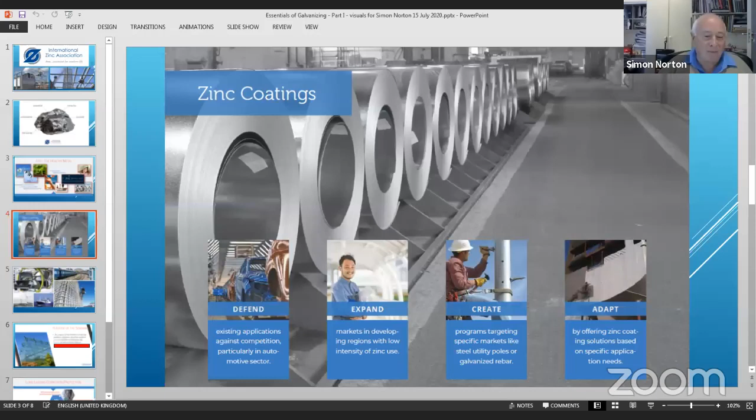Zinc thermal spray can be used on the hulls and superstructure of vessels such as trawlers. And later on, we'll see an example of zinc thermal spray as it's used on wind farms.

So the purpose of this seminar is to educate architects, engineers, and other specifiers about the benefits of using hot-dip galvanized steel on a myriad of projects. And we've produced a marvelous booklet for you with everything you'll need about galvanizing.

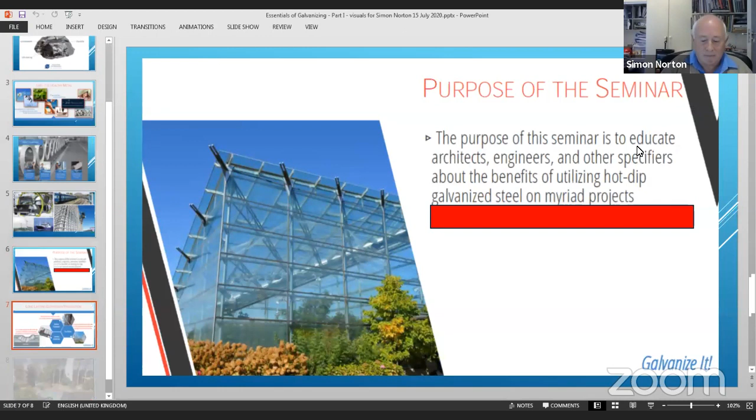Just to briefly introduce you to the concepts of zinc as a material for galvanizing, it offers three possibilities. Firstly, it's a barrier. Secondly, electrically, it is the cathodic protector, and it is actually sacrificed first. And thirdly, it forms what we call a zinc patina, where it reacts with the atmosphere with carbon dioxide to form a very tough film.

But that I'm going to leave to the experts later, to Terry Smith, who'll come in a short while.

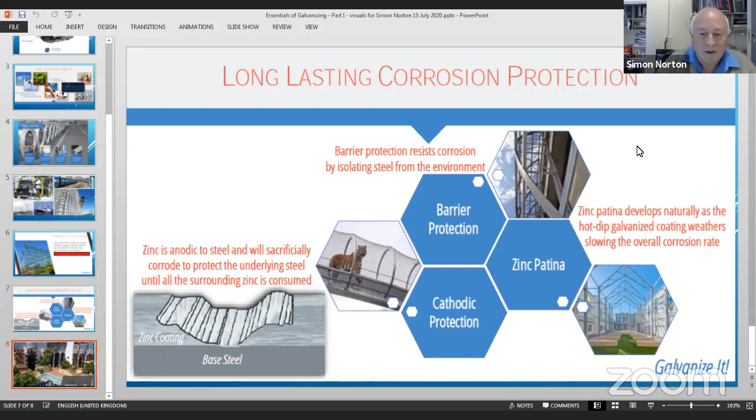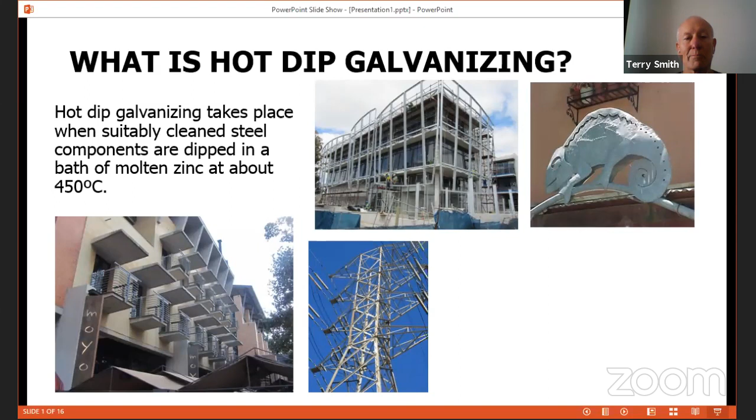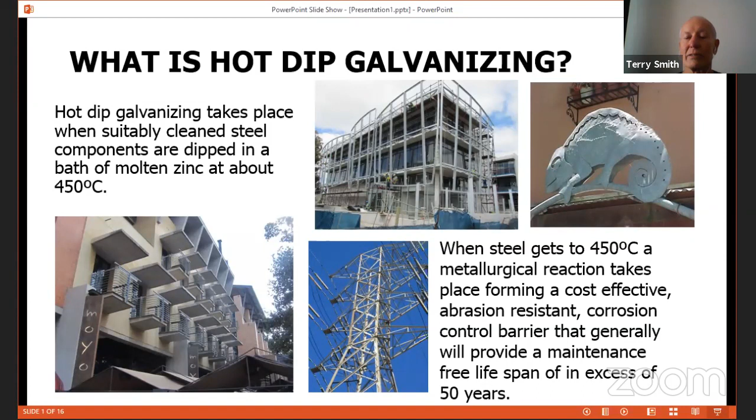Ladies and gentlemen, I'm going to talk a little bit about hot-dip galvanizing, as you heard. We asked the question, what is hot-dip galvanizing? Hot-dip galvanizing happens when you take pre-cleaned steel and dip it in a bath at 450 degrees C. Zinc melts at about 419 degrees C. When the temperature of the steel reaches 450 degrees C, a reaction takes place, giving you an abrasion-resistant, cost-effective coating, which will last at least 50 years in the atmosphere.

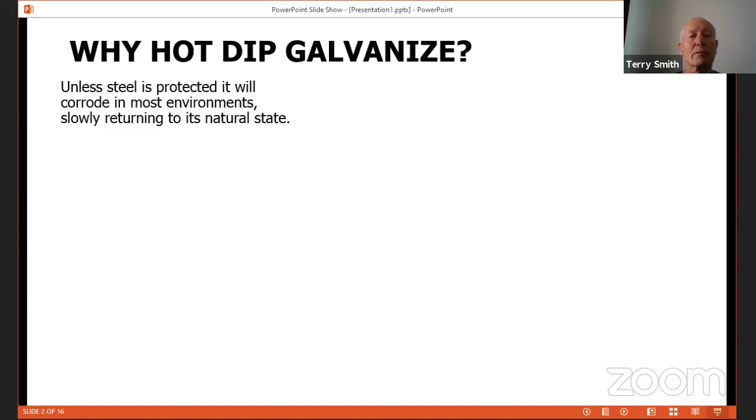Why hot-dip galvanize? Unless steel is protected, it will corrode and slowly return to its natural state. Putting a barrier coat on, such as galvanizing or paint, is good for corrosion protection. Unlike paint, zinc and its alloys from hot-dip galvanizing are metallurgically bonded to the steel and have been around for 185 years.

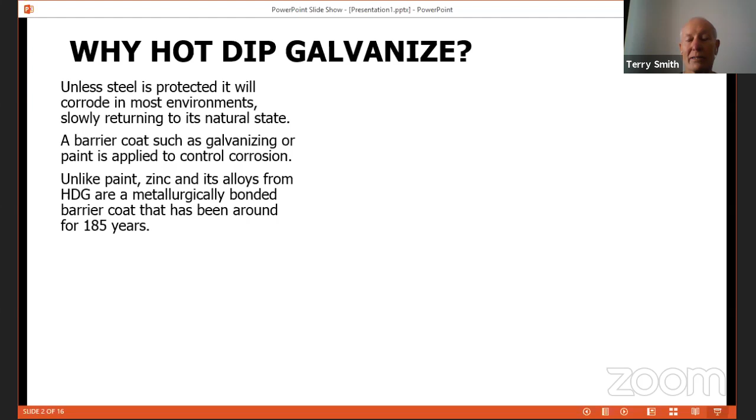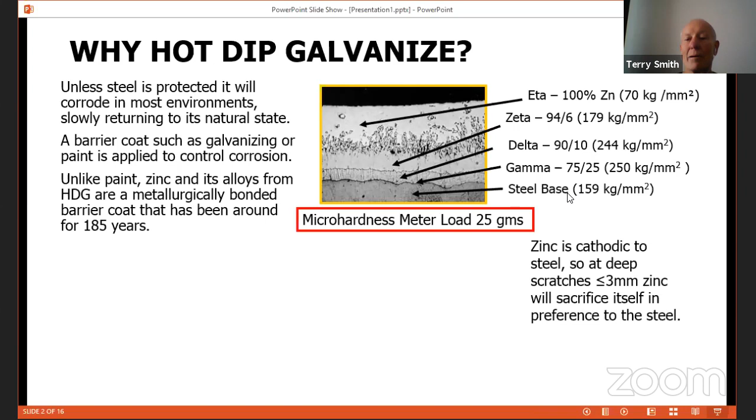Zinc is also cathodic to steel. So at a scratch of up to 3 millimeters, the surrounding zinc will preferentially corrode in favor of the steel. This can be seen here in the typical corrosion cell. On one side, we see steel, which is the cathode. On the other side, zinc, which is the anode, placed in an electrolyte with an electrical connection - those four things constitute the corrosion cell. So using this technique, the zinc sacrifices itself in preference to the steel.

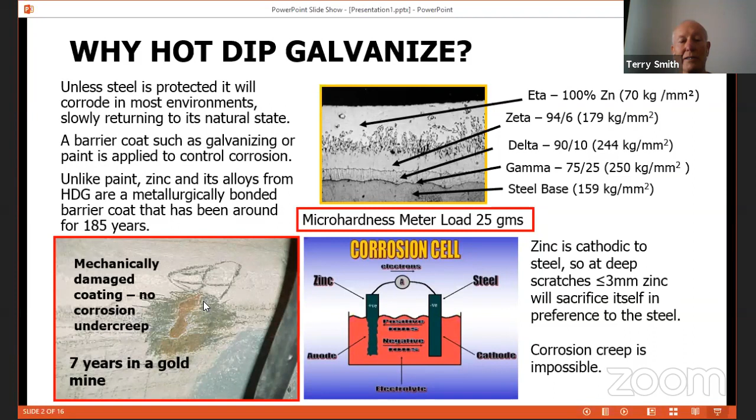Corrosion creep is also impossible with hot-dip galvanizing. Here's some mechanical damage to the coating after 7 years in a gold mine on some shaft guides, and you can see there's no corrosion creep at all.

Why hot-dip galvanized? Inspection is easy. All we have to look at is coating continuity and coating thickness. The process is extremely quick, and there's no curing time. Once it's cooled, components can be inspected and loaded on a truck. It's also an honest coating. If steel is not clean, it will not hot-dip galvanize.

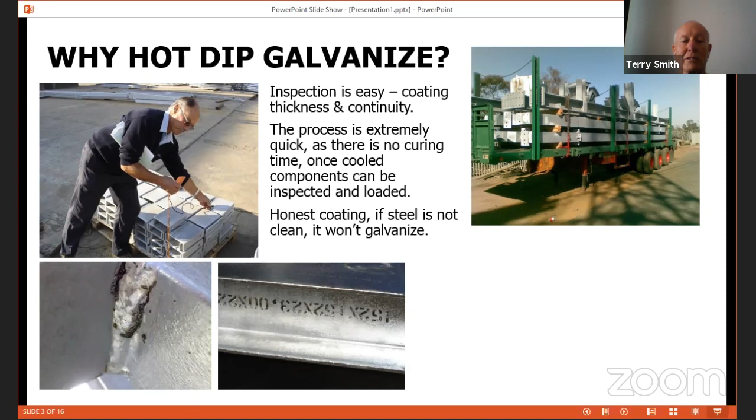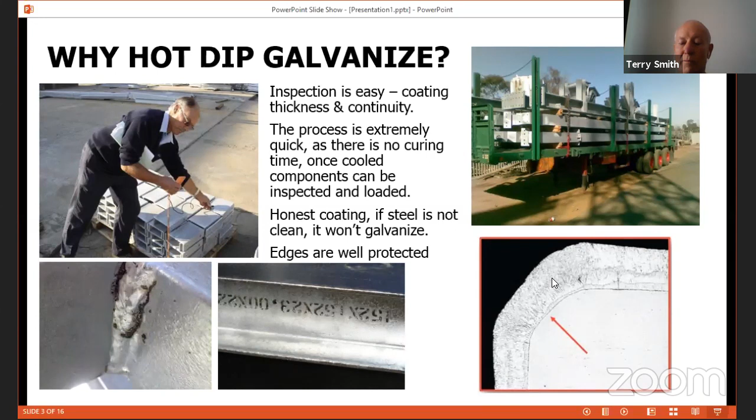And here you can see typical examples. So weld slag, which is not removed, is shown typically after galvanizing. There's some oil-based lettering, which wasn't removed. You can see it. So the converse of that, if the steel looks good, it is good. And edges are also well protected, very different to paint, where paint thins out and would normally have to be stripe coated. Galvanizing forms equal coating around the edges.

Comparing types of hot-dip galvanizing, you have continuous hot-dip galvanized sheet to that standard. This is the process. Items are decoiled and go through a welding process, looping, and then into an annealing furnace, which is heated to about 900 degrees C, runs down into the zinc bath at about 100 to 140 meters a minute, through these gas or air knives, which mechanically wipe the coating to the different coating grades that are available.

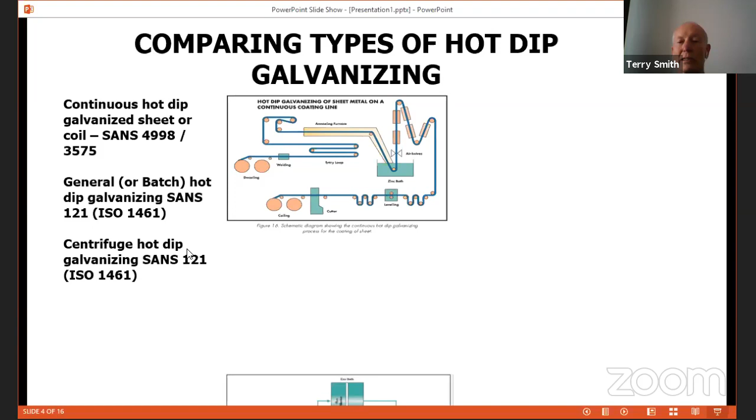General or centrifuge galvanizing are both done to SANS 121. So this is the process. It starts off with jigging, degreasing, water rinsing, acid pickling, rinsing again, final fluxing, drying, and then into the zinc bath where the reaction takes place. Centrifuge galvanizing goes through the bottom process here.

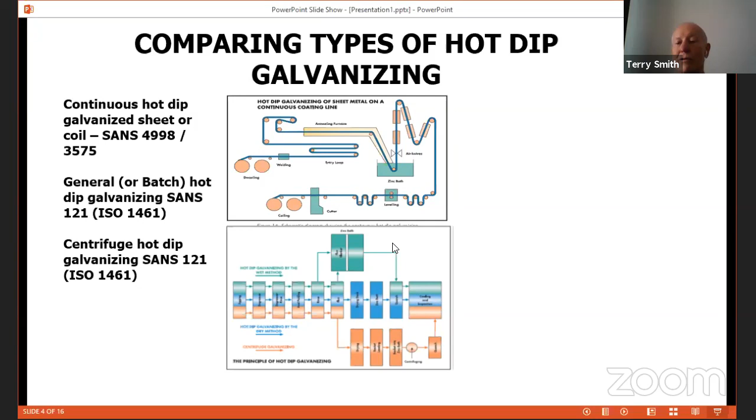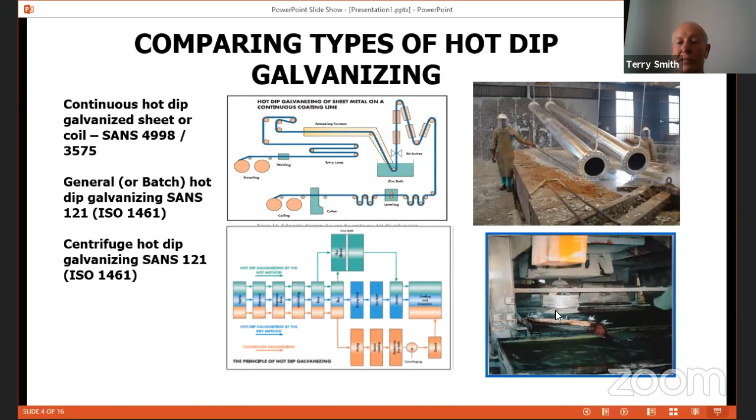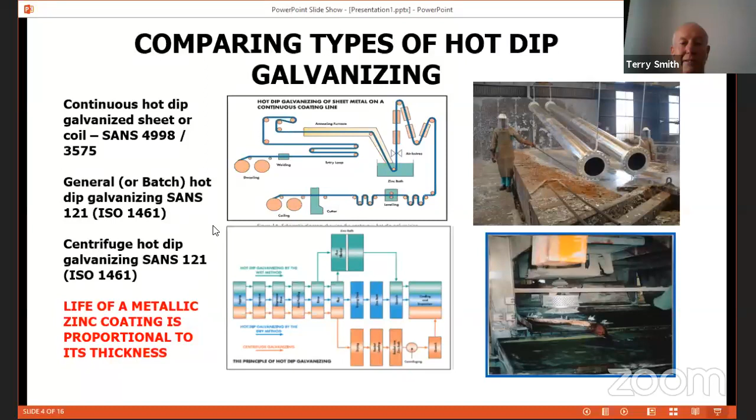After galvanizing in baskets, it goes on to a centrifuge, and that rapidly spins. Here you can see hot-dip galvanizing coming out of the bath, general galvanizing, and here's a spin galvanizing operation where the basket is opened out and the items then fall out into the quench bath. Just bear in mind that the life of a metallic zinc coating is proportional to its thickness. So the thicker the coating, the longer it will last.

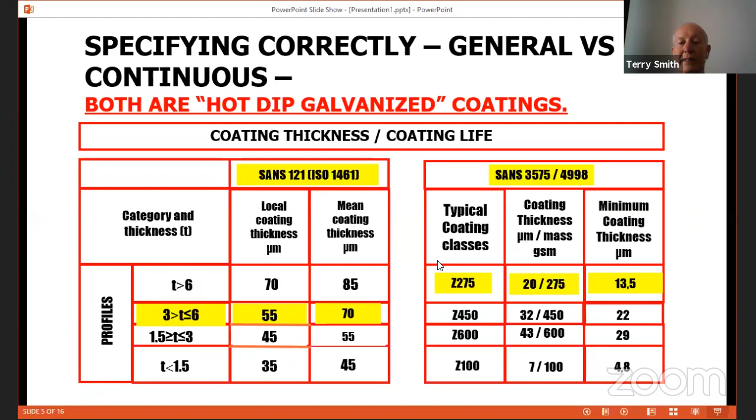Here's a comparison between two different specifications, one general and one continuous. Both are known as hot-dip galvanized coatings. What I've done is I've taken the instance of SANS 121, which is the general galvanizing spec, and I've taken a profile of 3 millimeters or less than 6. You can see the local coating thickness is 55 and the mean is 70 microns. If you look over this side under the continuous galvanized, I've got Z275, which is a nominal coating of about 20 microns and a minimum of 13.5. Let's compare those things on a site.

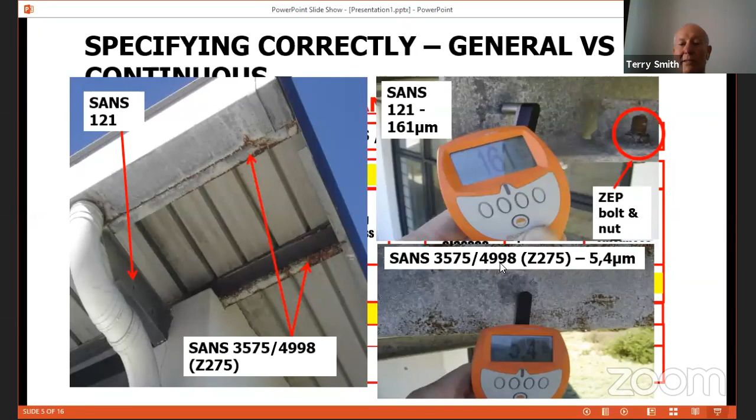Here's a site at Capricorn Park, which is about 400 meters away from the high water mark at False Bay, which is a very aggressive condition. Here you can see some trusses, which are hot-dip galvanized to SANS 121, coating thickness around about 161 microns. All the purlins were only continuous galvanized Z275, down to a coating of about 5.4 microns, in some areas got red rust. And that's 3 years in a C5 marine atmosphere.

This is the typical table that's given out in these three standards. You're looking at from C1 to C5 or CX environments. The more aggressive is obviously C5. If you look at C3, for instance, the corrosion rate of zinc is about 0.5 to about 2 microns a year. And you go down to C5, you're looking at 4 to 8 microns a year. And a Z275 would last between 3 to 5 years. And hot-dip galvanizing 70 microns would last between 9 and 18 years.

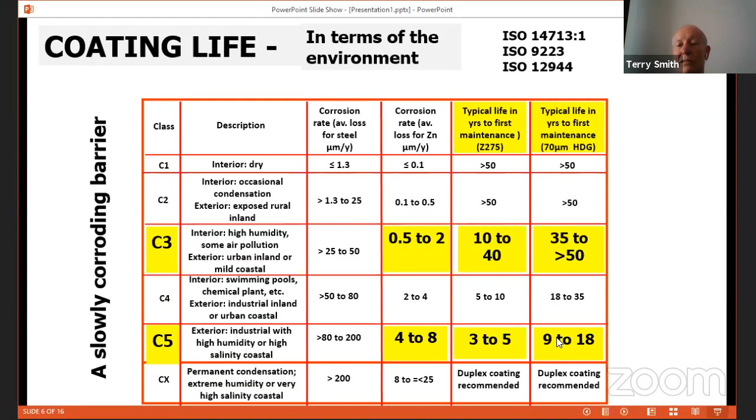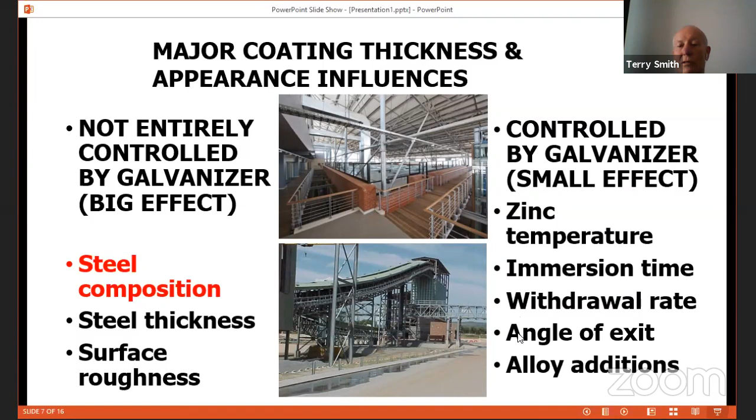Okay, so we have the major influences on coating thickness and appearance. Not controlled by the galvanizer, and having a big effect, is the steel composition, steel thickness, and surface roughness. What is controlled by the galvanizer? The zinc temperature, the immersion time, the withdrawal rate, the angle of exit, and the alloy that's added to the molten zinc. So we look at the biggest influence.

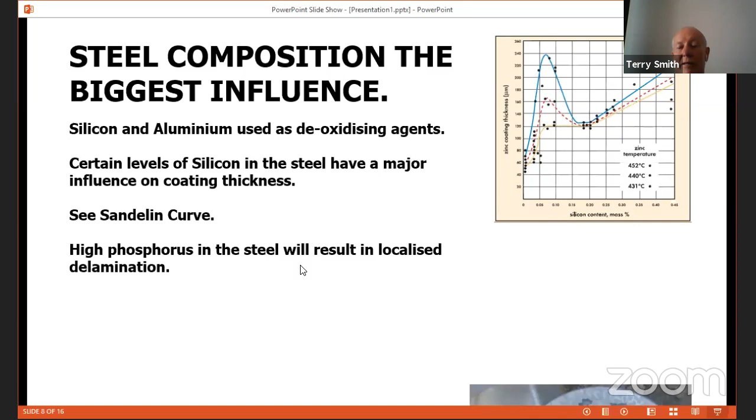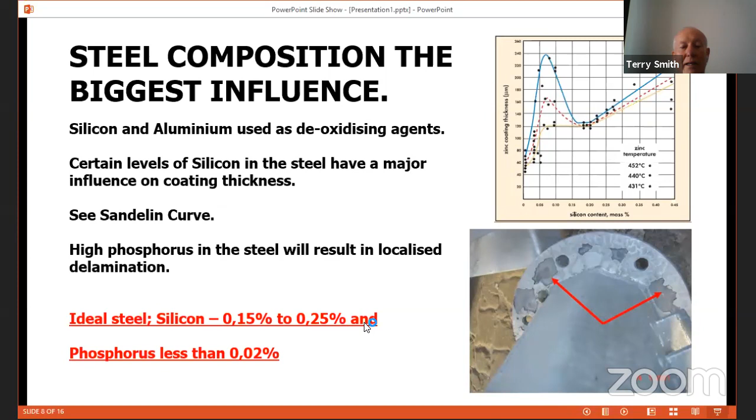So high phosphorus in steel will also result in localized delamination. Now, phosphorus is not added to any molten steel. It depends on where the steel or the iron is mined in the country or in the world. So yeah, you can see this is a mast. The bottom flange has got a high phosphorus. You can see the delamination, whereas the mast itself, the galvanizing is 100%. So ideal steel, silicon between 0.15% and 0.25%, and phosphorus less than 0.02%.

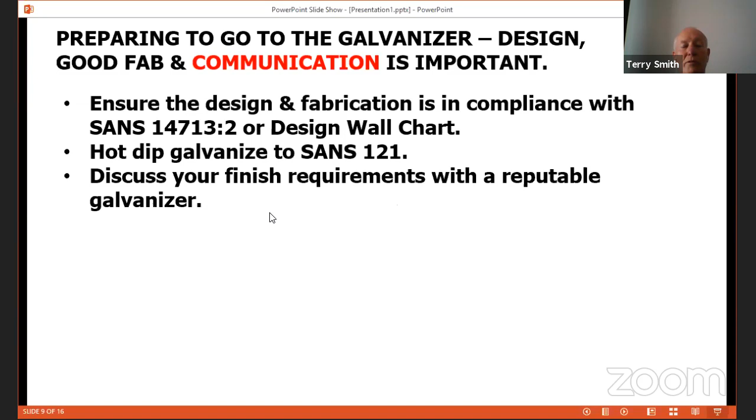Preparing to go to the galvanizer, design, good fabrication, and communication is extremely important. Ensure that the design and fabrication is done in compliance with SANS 14713 Part 2 or the design wall chart. Hot-dip galvanized to SANS 121. Don't just say hot-dip galvanized at all. Discuss the finish requirements with a reputable galvanizer. Keep on communicating either way.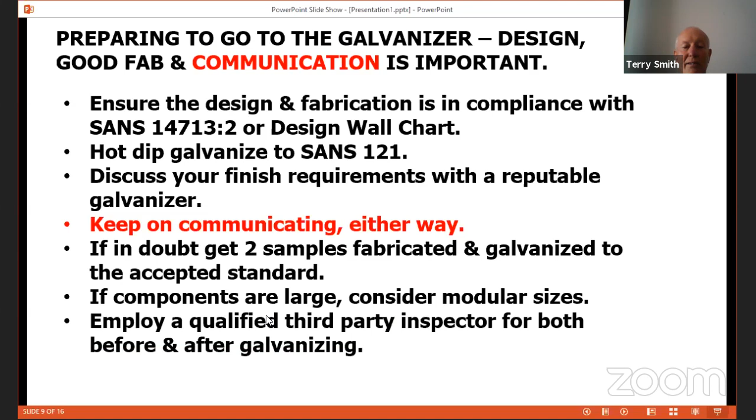If in doubt, get 2 samples fabricated and galvanized to the accepted standard. And if components are too large, consider modular sizes. Employ a qualified third-party inspector for both before and after hot-dip galvanizing. Don't forget the primary reason for hot-dip galvanizing is for corrosion protection.

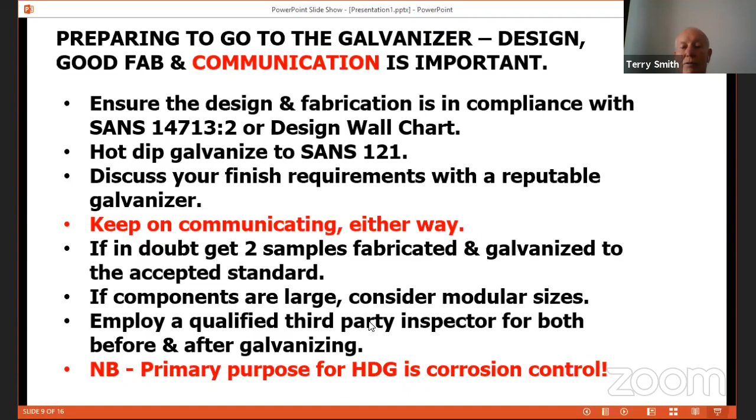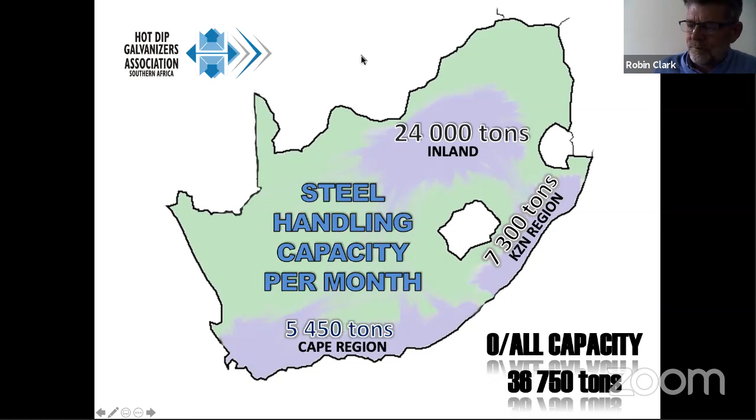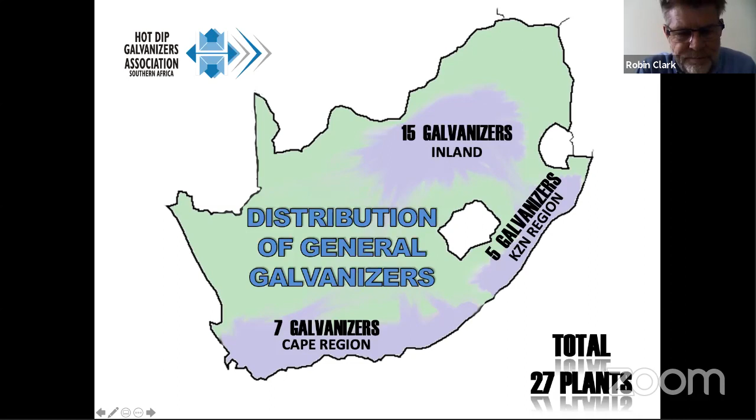We've also asked some questions with regard to duplex and duplex coatings. And I don't know if we can put up the next slide, please, Shannon. So I am aware of 2 galvanizers that have made a direct investment in a paint application on an industrial scale. But most galvanizers have developed a relationship with paint applicators.

And to expand on this, generally the project flow is the designer signs a contract with the contractor. The contractor engages with the fabricator, and the fabricator approaches the galvanizer either to galvanize or potentially to duplex. Between the fabricator and the galvanizer, they will engage with a painter, and the fabricator will be able to access a finished product, both galvanized and painted.

I've taken the liberty also to expand on the question a little bit, and most of the galvanizers that we have relationships with will be able to provide a duplex system, either in-house or, as I say, with strategic partners. Okay, most galvanizers also shot blast. They will be able to apply zinc thermal spraying to varying degrees, either as a renovation medium or possibly on a commercial basis. I believe Simon will be dealing with that in a bit.

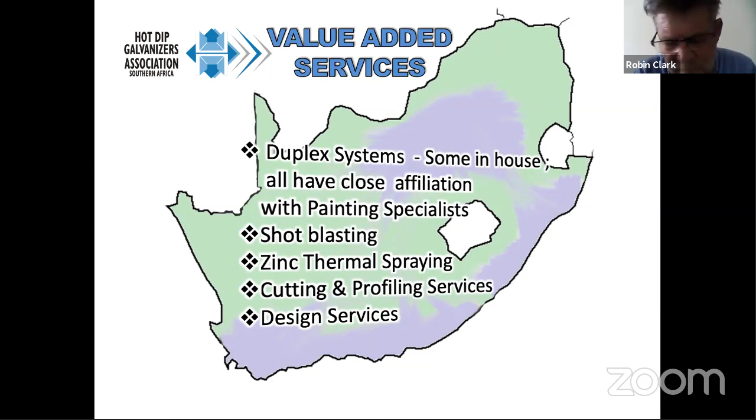So the operating norm is for a fabricator to transport and to manage the logistics for medium and large projects. In other words, bring the material to the galvanizer and then collect it. But notwithstanding this, almost all the galvanizers in South Africa, certainly amongst our members, provide a collection and delivery service, either using their own resources or contracting in as required.

Several of the larger galvanizers, particularly in the Gauteng area, have established an advanced logistical capability and are able to assist customers with direct transport to site fairly far afield as well. So those services do exist.

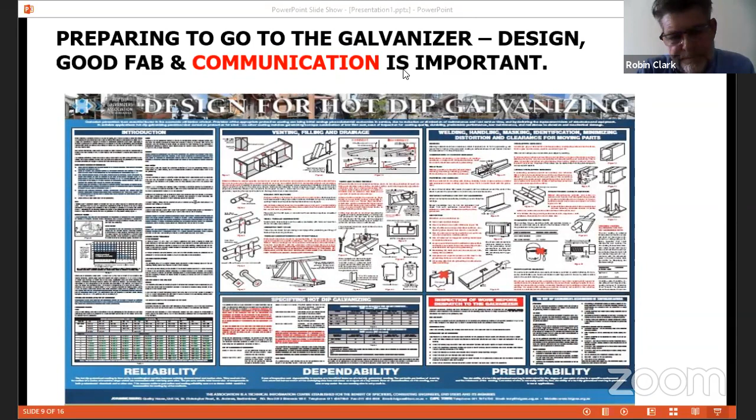We move back now to Terry Smith, who's going to explain the process to follow after galvanizing. Not working. We can hear you, Terry.

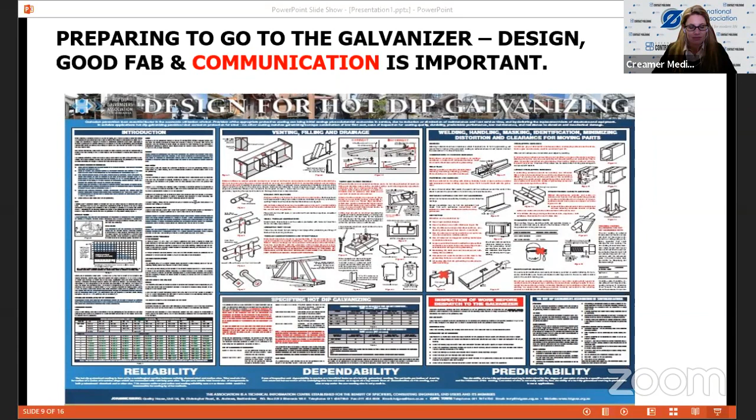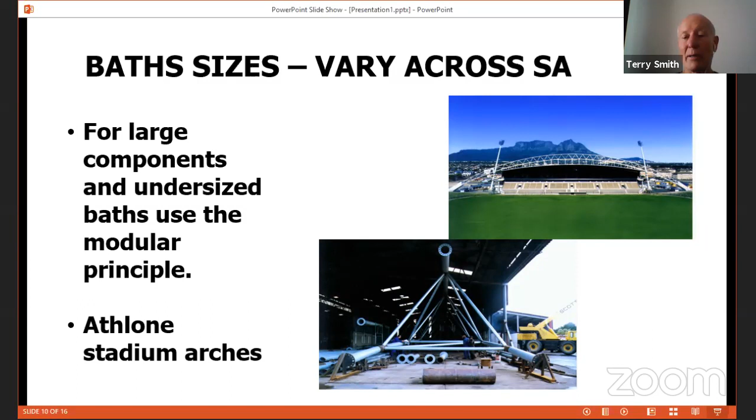So all the tubes were processed, so they were prepared for hot-dip galvanizing by masking the ends for welding purposes. They were galvanized on jigs, which gave them the right angle, right immersion. And then afterwards, the mask was cleaned off. The items were welded. As you can see there, there are uncoated areas. And then that was zinc metal sprayed, and that arch got 2 coats of paint.

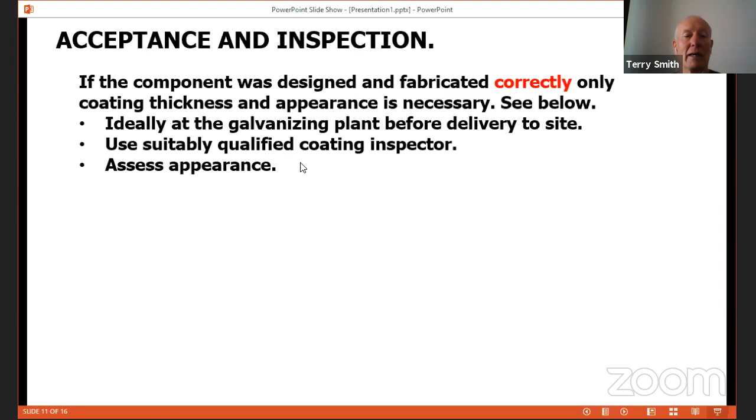Acceptance and inspection. If the component was designed and fabricated correctly, the coating thickness and appearance are the only things that are necessary. Ideally, this inspection should take place at the galvanizing plant before delivery to site. Use a suitably qualified coating inspector. And just based on that, I know the Hot Dip Galvanizers Association has courses for this purpose. Assess the appearance of the item, take coating thickness readings, according to SANS 121.

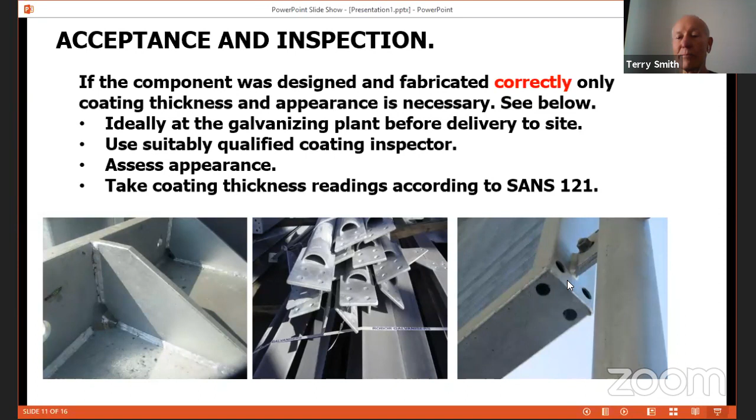And here you can see several pictures of well-designed, well-galvanized and fabricated items. These are nice big coping holes, allowing the zinc to flow through when it goes into the zinc bath. At the end of the tubes, this gusset plate has been welded inside the tube so the zinc can flow out. And the same on this one, with the holes right in the corner of the item. Appropriate versus inappropriate.

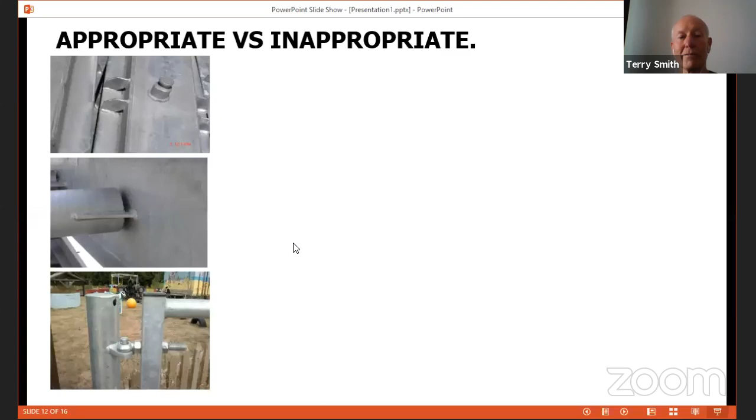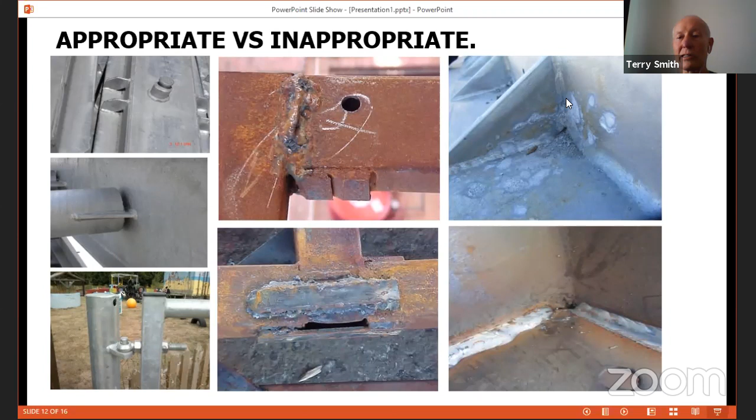And this is the less appropriate type of fabrication that we get coming into the galvanizing plant. What the guys don't realize, all the weld slag here and here, little holes, etc., and that hole not being in the right position can lead to very bad galvanizing, much the same as this. You can see these coping holes very small. You've got ash in the surface and this one as well.

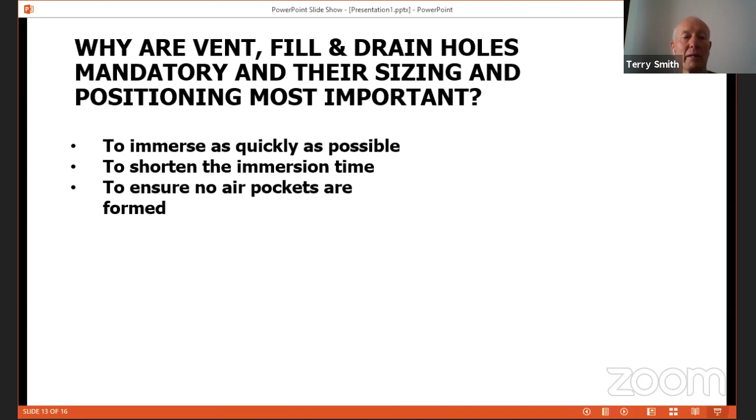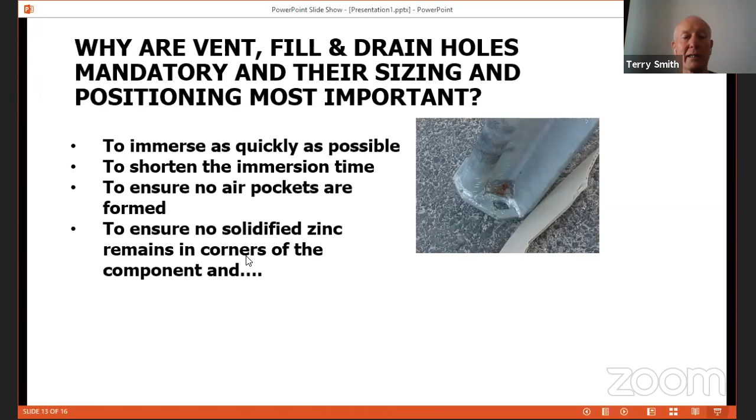So why are vent, fill, and drain holes mandatory and their sizing and positioning most important? To immerse the item as quickly as possible in the molten zinc, to shorten the immersion time, ensure that no air pockets are formed. And here you can see a typical example where you've got an air pocket, which obviously needs to be repaired. To ensure no solidified zinc remains in the corners of the component. And here you can see taking out the zinc that is solidified in that item.

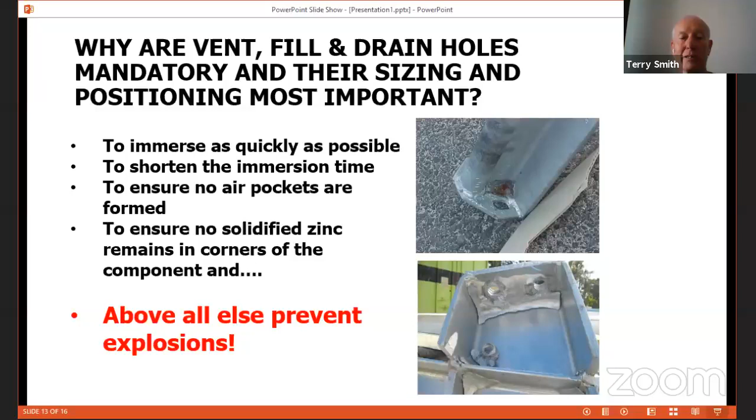Above all else, to prevent explosions. Now, generally, if you have any moisture that's contained within an item that is being galvanized, as soon as it hits the bath, that moisture changes into superheated steam, which has got a volume change of 1 to 1700 times in volume. And this is basically what happens. It's extremely dangerous, not only to the galvanizer, where this can actually certainly maim or kill people.

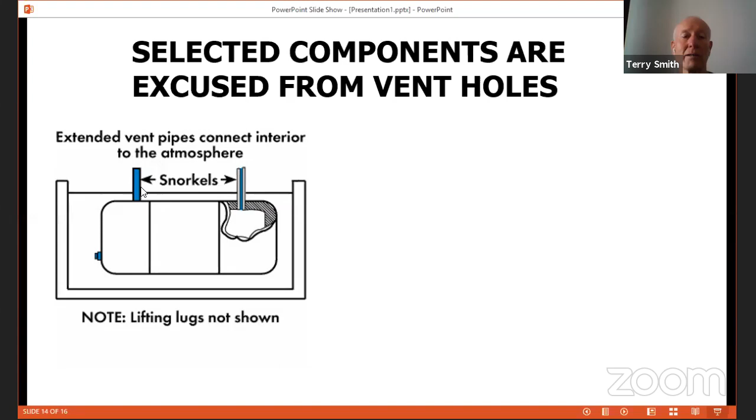Selected components are excused from vent holes. Here we have an item like this, not galvanized on the inside, with snorkels that allow the thing to be immersed, much the same as the heat exchangers. You can see the snorkels sticking out. And then when it's put into the galvanizing bath, it is forced in, so it actually displaces the zinc and it coats only on the outside, and then they cut the snorkels off afterwards.

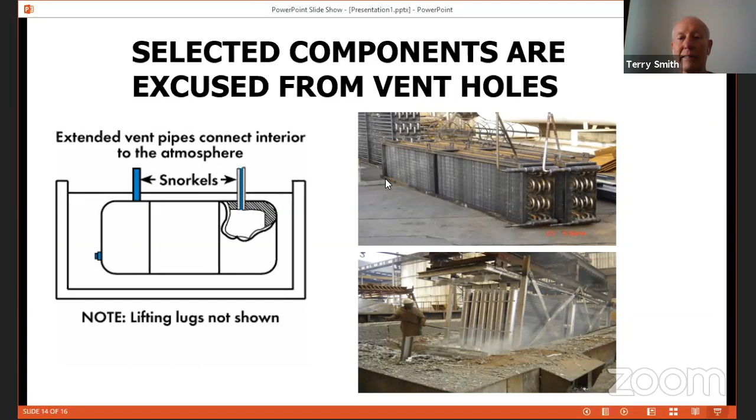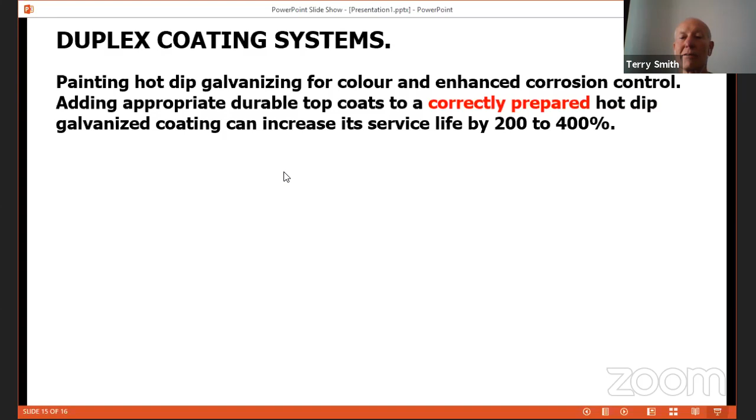Duplex coating systems, as Robin talked about, painting over hot-dip galvanizing for color and enhanced corrosion control. Adding appropriate durable top coats to a correctly prepared hot-dip galvanized coating can increase its service life by 200 to 400%. Preparation is extremely important, including informing the galvanizer of the intention to duplex, as the passivation stage must be excluded.

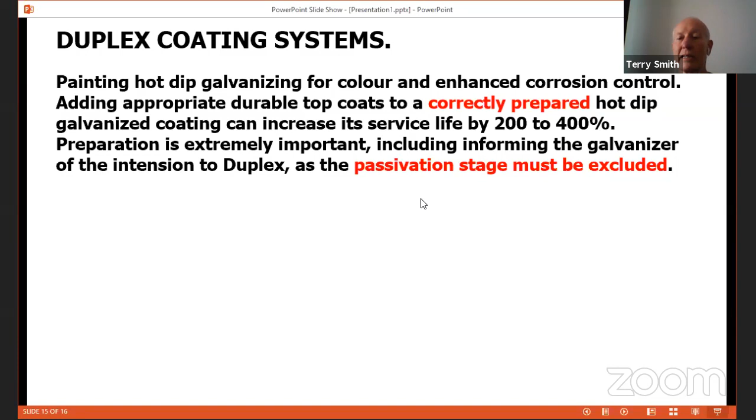Here you can see some items that have been duplexed. This is a bridge which is hot-dip galvanized and painted in the V&A Waterfront. There's a house which is about 80 tons of structural steel down in Rooi-Els. The steel was hot-dip galvanized, and then in factory conditions, 3 coats of paint were applied, and then it came to site. Items were put together and a final coat of paint was put on. It was given a 10-year guarantee.

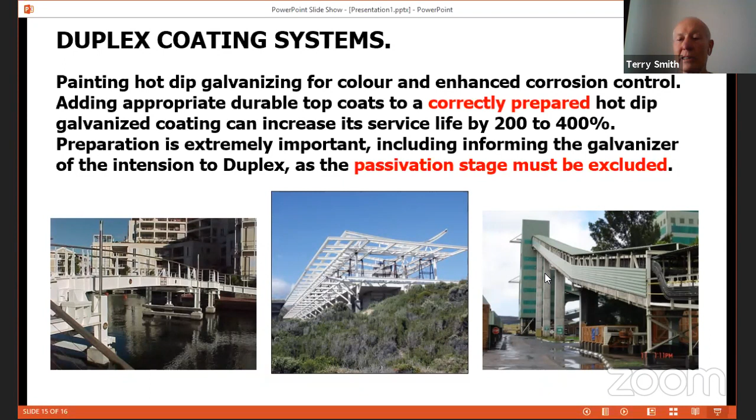This is Twistdraai coal colliery, where galvanizing was painted with a substantial paint system. And this picture was taken after about 20-odd years, and there was nothing wrong with the coating whatsoever. Additional applications in mining, which is not happening in South Africa, but I just wanted to tell you a little bit about. Hot-dip galvanizing has been the coating of choice in deep level mining for more than 50-odd years.

23,000 tons of hot-dip galvanized shaft guides and buntons ready for installation in a 3-kilometer deep mine. Here you can see the buntons standing on the surface, all ready to go into the mine. These are the spider web of steelwork. This is the vertical steelwork, which is shaft guides, all hot-dip galvanized for a life of about 25 years underground in the mine.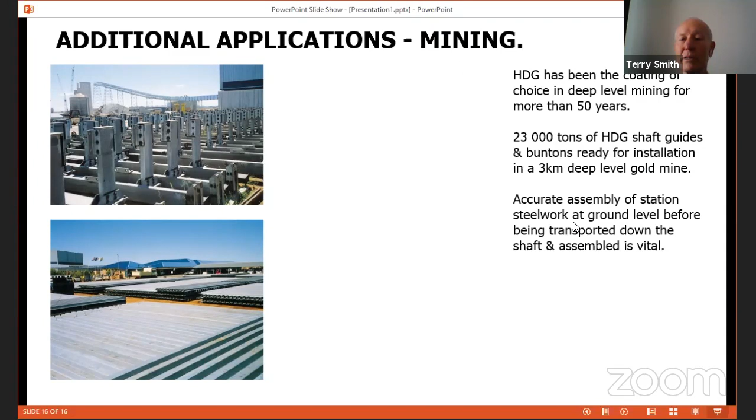Accurate assembly of the station steelwork, which happens quite frequently on the way down the mine, at ground level before being transported down the shaft, is vital because each one of these components is now marked and taken down the shaft and assembled, and obviously you can't do changes down there.

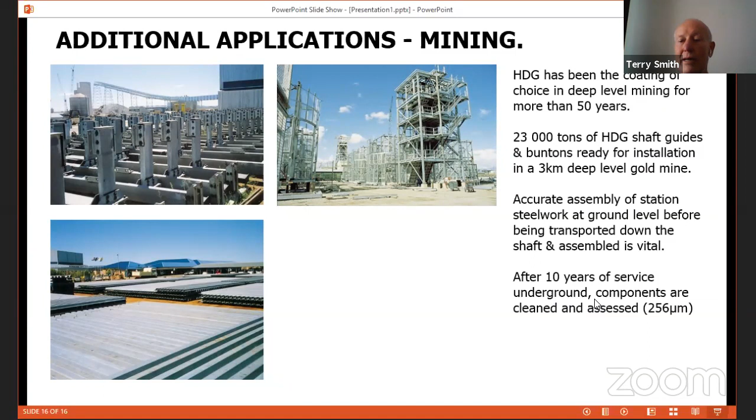Then after 10 years of service, we often used to get involved underground, assess the components, and you can imagine what this looks like with 10 years of mining. There's a lot of junk on the things. We clean it off and measure the residual coating. And you can see here 256-odd microns.

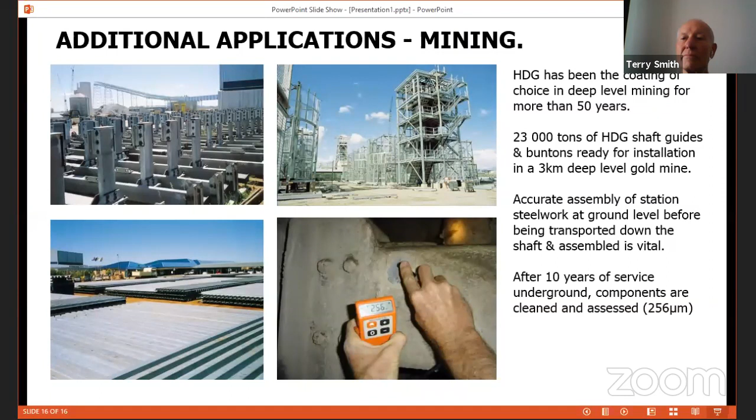Thank you so very much, Terry. We're going to now hear from Simon about some other applications where zinc is used.

Good afternoon, listeners. We have an enormous field to cover in the use of zinc in corrosion protection. We've given you a little taste of the essentials of galvanizing, both from Robin Clark at the Hot Dip Galvanizers Association and Terry Smith, who's the technical expert on galvanizing and galvanized coatings, and the duplex coating system where you put an organic coating over galvanizing. But there are other areas as well.

Firstly, there's thermal spraying, where you use molten zinc to spray onto a piece of equipment. If, for instance, you have steel that you feel can't be galvanized, you can use zinc thermal spray. If you can't galvanize it because we don't have a big enough kettle in South Africa to dip the component in, you would then zinc thermal spray. If you want something that's immediately available because it doesn't have to dry like an organic coating, then you would use a zinc thermal spray.

I am hoping today that the chairman of the South African Thermal Spray Association, Mr. Adam Wintle, will actually be attending this webinar. And should there be anybody who's interested in having components thermally sprayed, please contact me at the International Zinc Association. We at the IZA are also interested in thermal spray as it's applied to marine applications, and we'd like to find a vessel where we could carry out a thermal spray of the vessel before we coat it, because we'd like to measure that over a period of time.

Thank you very much, ladies and gentlemen. I hope you found that brief review of zinc thermal spraying very useful, and you noticed how organic coatings were used. The components were bigger than possibly the baths in the galvanizing plant. And if you have any further requests for information on zinc thermal spray, we would only be too glad to help you. Shannon, it's over to you now.

Thanks very much, Simon. We're going to now move to our Q&A, and we have about 8 questions that have come through. Our first question, I'm not sure who this will be directed at, perhaps Simon will be able to pass it to the next person: what is your opinion of the use of cold galvanizing products for local repairs to products which have been previously galvanized? That's definitely a question for Terry Smith. Over to you, Terry.

Okay, can you hear me? I think Robin could also probably answer this. Years ago, we knew that the SANS 121 specification was coming out and would allow zinc-rich paints to be used. We did a number of tests at the association, and we found that a dual pack of a zinc-rich epoxy worked very well. That's now been packed into squish packs. There are 2 types on the market, very well done.